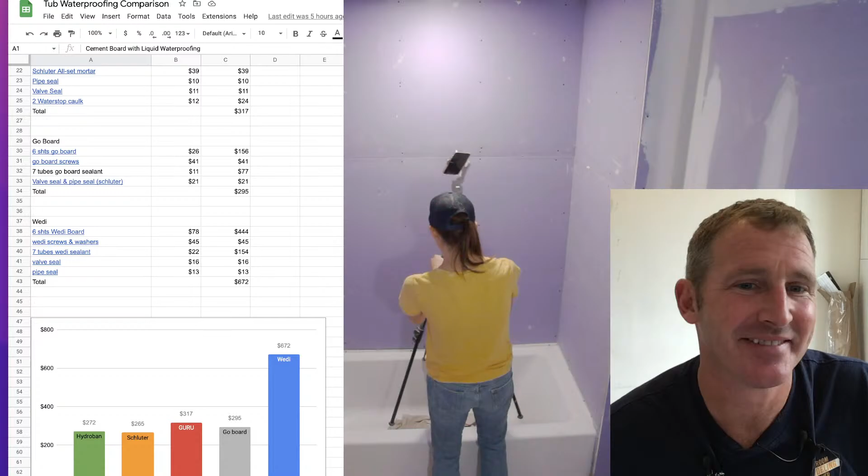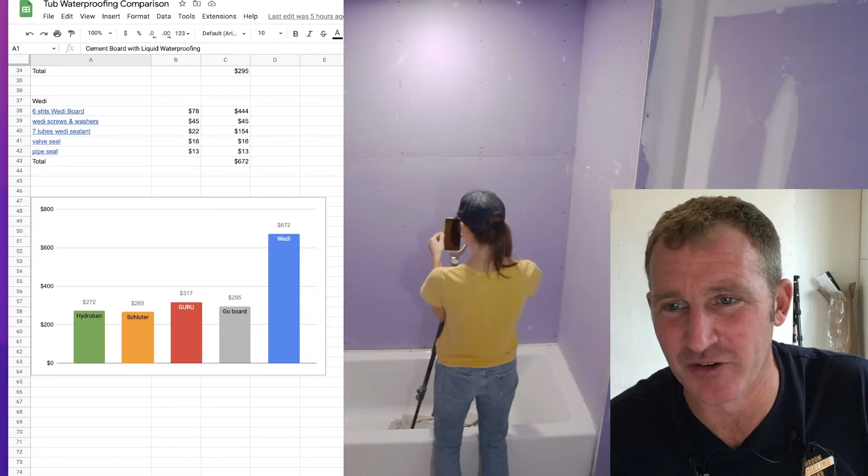I have a really good live stream here today. We're going to go over installing a tub surround, or waterproofing a tub surround. So as you can see in the background here, we installed the tub. I put drywall up. I know that seems crazy to a lot of people, putting drywall up around a tub surround.

But we're going to get into waterproofing this and why I used drywall. But first, before I get started, I wanted to talk about the different systems that are out there, because I often get questions about what's the best system, what system do you recommend, what would you use? I use all types of different systems.

They all have their applications where it's helpful. A lot of it really does just come down to availability though, and the timing of when I'm going to purchase this stuff. Sometimes these foam boards and different things get out of stock and it takes time to get them in. Sometimes it's just budget related and I don't have the expense to get the better systems that I like.

So let me go through. I've created a little comparison sheet here that I put up this morning. This is with 2022 pricing, whatever day it is today, September 13th. So take this with a grain of salt if you're watching this later on, because prices can change on a lot of things.

But I created a spreadsheet on what it would cost to do a standard tub surround. The one thing about the waterproofing system is that's all we're trying to do - get the shower waterproof behind the tile so the tub surround can last a very long time. That's really the main goal of doing any of that.

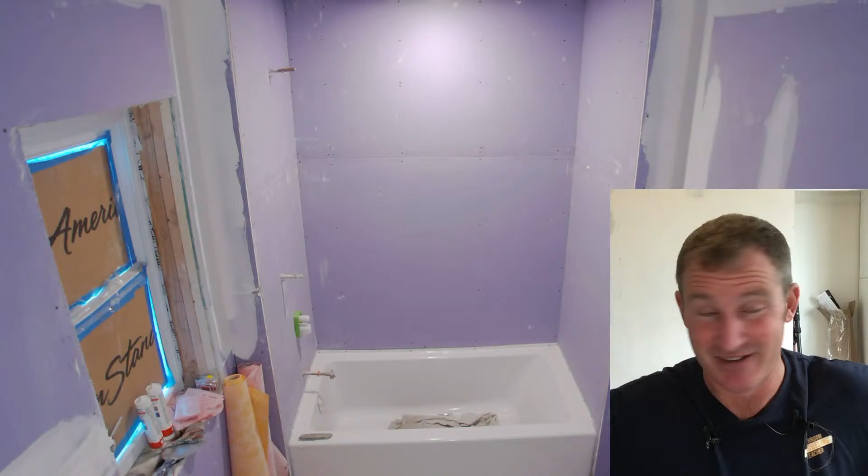That's not to say that when I first started out, I used HardieBacker and cement board and went directly over it, and it seems a lot of those tile jobs are still lasting today. But if you do the waterproofing, you'll ensure things last a really long time and you won't have mold issues later on.

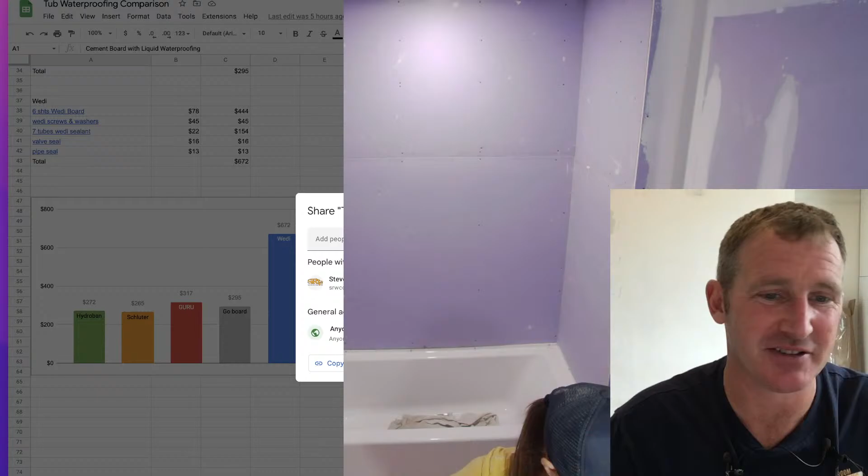This is basically just a highlight of what it would cost to do cement board with a liquid waterproofing. That seems to be a lot of people's go-to - they want to do cement board, maybe do a RedGard. If I were to give you a recommendation, I'd go with something like Hydroban if you're going to do a liquid membrane. Cement board obviously is just available everywhere.

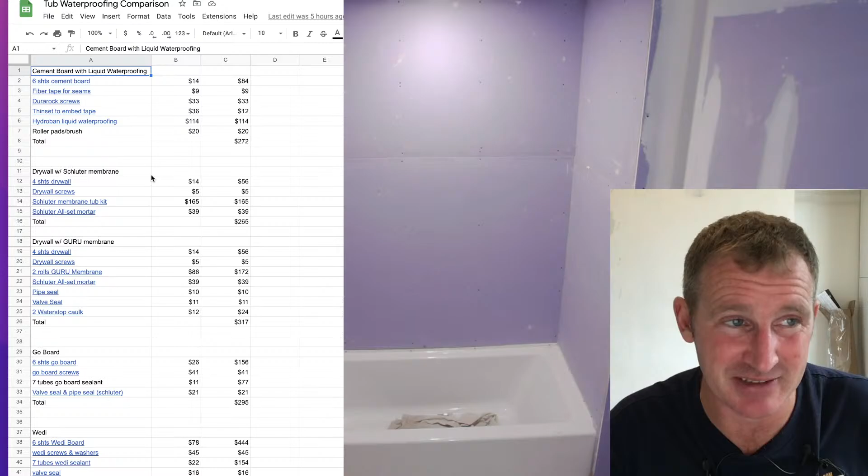You can almost always get it. You might just go to the home store and that's where you want to buy everything, so you're definitely going to be able to purchase this at any home store. Looking at this, you can click on these links, by the way, and it'll bring you wherever I have the links to. So Home Depot - cement board's what, $14 a sheet? Not too bad. You need about 6 sheets to do a standard tub surround.

So you're only talking about $84 for cement board. That's very appealing to a lot of people, makes a lot of sense. But it takes a little bit more time to install, it's a little bit difficult to install, it's dusty, especially if you're using something like HardieBacker - cutting it is a nightmare.

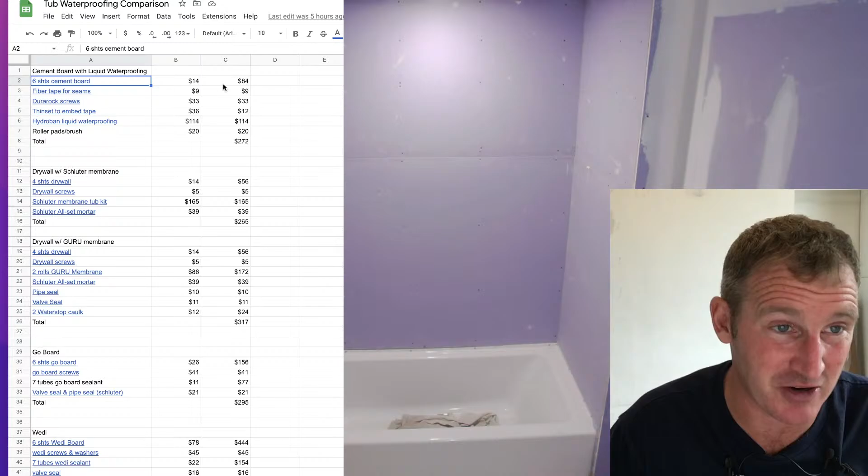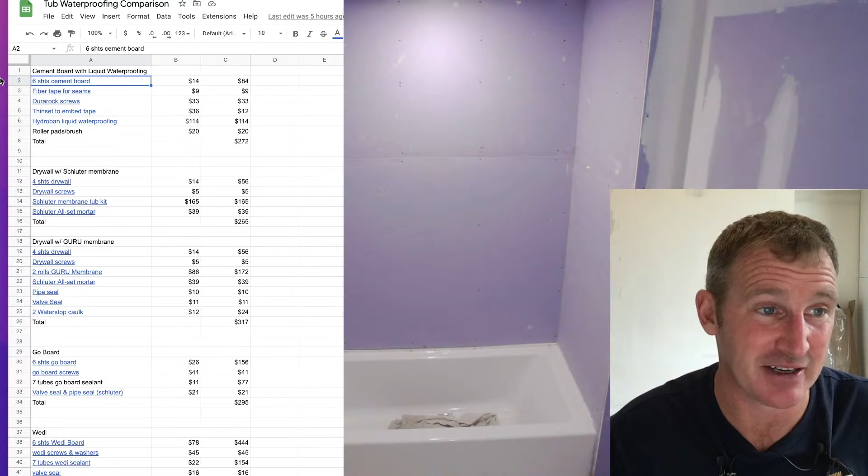Overall, it's just a little bit more cumbersome to actually install the actual product. Plus, you have to address all the seams. So you're going to have to do some kind of fiber cement board, or a fiber tape, that you're going to have to embed with thinset on all the seams. So that takes a little bit more time.

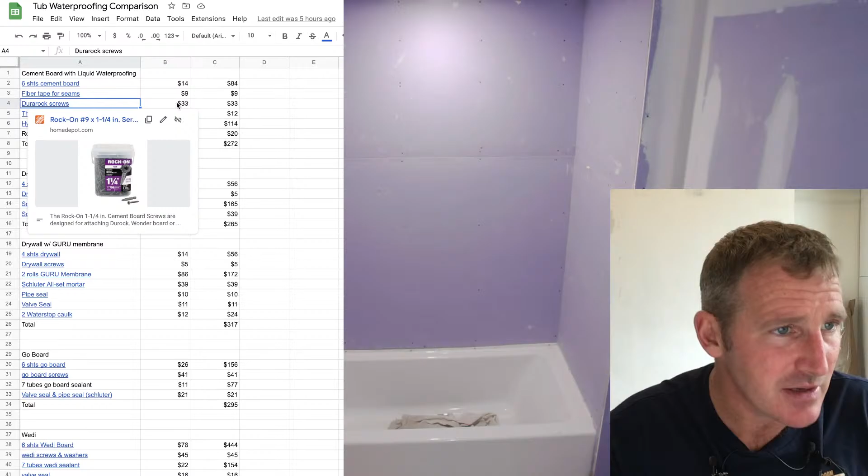You got to let that dry before you go moving on to the liquid waterproofing. So here's a recommendation I have: I would definitely recommend using Hydroban if you're going to go with the liquid waterproofing concept, because it dries really quickly. You can get 2 coats on immediately.

A lot of people like going to the home stores and just buying the RedGard that is sitting there. That stuff definitely takes a long time to dry, and really to get it to the mil thickness that custom wants you to be at, it might actually take you 3 coats to get there.

So if I were to do cement board and seam the tapes with the fiber cement and then liquid waterproofing, I'm definitely not going to get onto the tiling until the better part of the following day. You pretty much have to put a day into putting the cement board up and putting the fiber on, and then the next day doing the liquid waterproofing. So if you're in a crunch, you're kind of drawing out the project because of the time period for everything to dry and get ready.

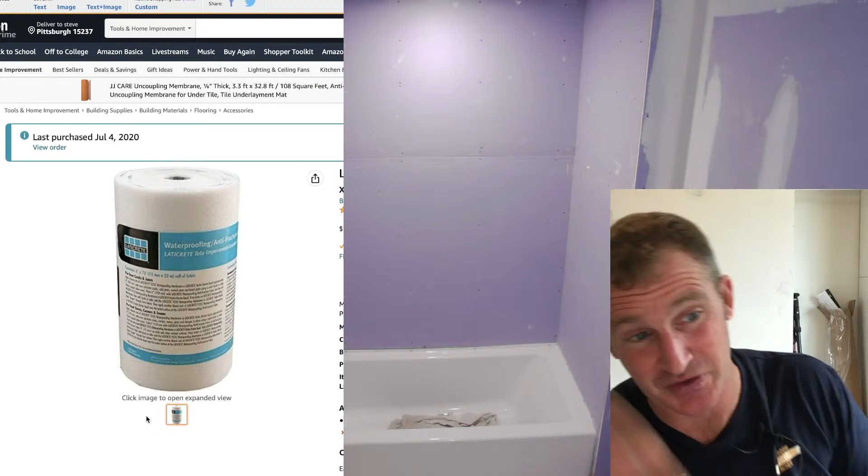Now you could use a rapid setting thinset, and that would address those seams. And Hydroban, you could technically just use their mesh, and use that as the fiber mesh aspect to it. So that might actually be a really great option for you, because you could get that all waterproofed and put in on a day. It's really hard to argue the cement board aspect with liquid waterproofing.

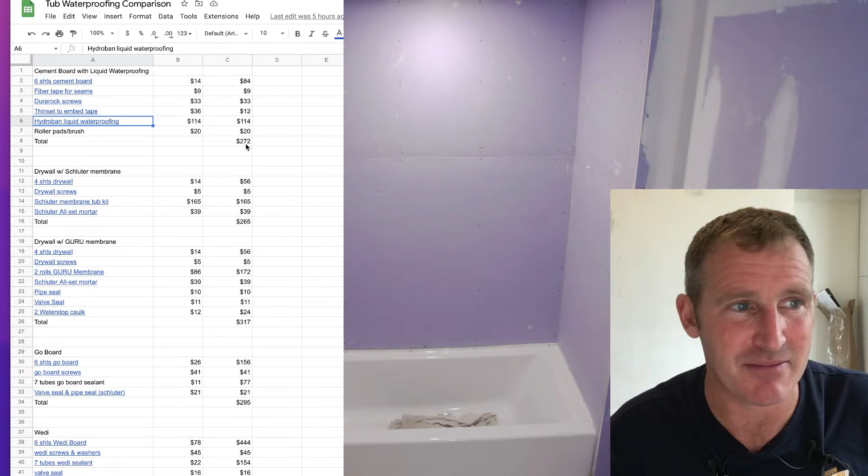It just takes a little bit more labor to install, but you can see here that my price of $272, you can get your tub surround with the backer board and liquid waterproofed. That's a pretty phenomenal price. Anything under 300 bucks is usually pretty dang good for doing a tub surround. So it's definitely a grade A way to go. Again, it's just a time consuming thing. It's going to take you most of the day probably to get this accomplished and be ready for tile.

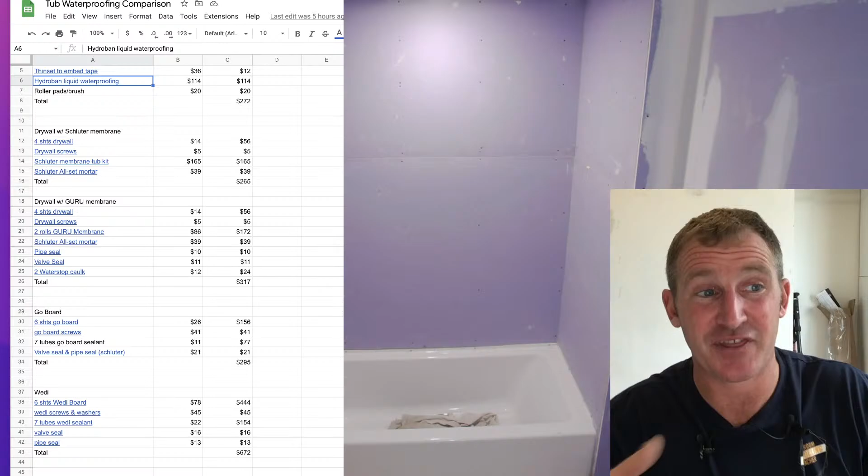So the second one and the third one are basically the same: it's a membrane over drywall, and that's essentially what I'm going to be doing on this shower, because you can see I already have the drywall up, and I'm going to be putting a membrane over it. This is very appealing because drywall is available everywhere, really easy to install, and it only took like 4 sheets to do the entire tub surround, and then I'll be thin setting a membrane over top of it.

A lot of times Schluter is probably the most popular type out there, and you can get it in a tub kit, which is actually a really reasonable price, I think, for the most part. This one, you get the membrane, you get the Kerdi-Fix that you would need to put around the perimeter at the tub flange, and then you get the pipe seal and the valve seal, and then some Kerdi-Band as well, all for $165. So that's really not too bad, everything considered of what you get in there.

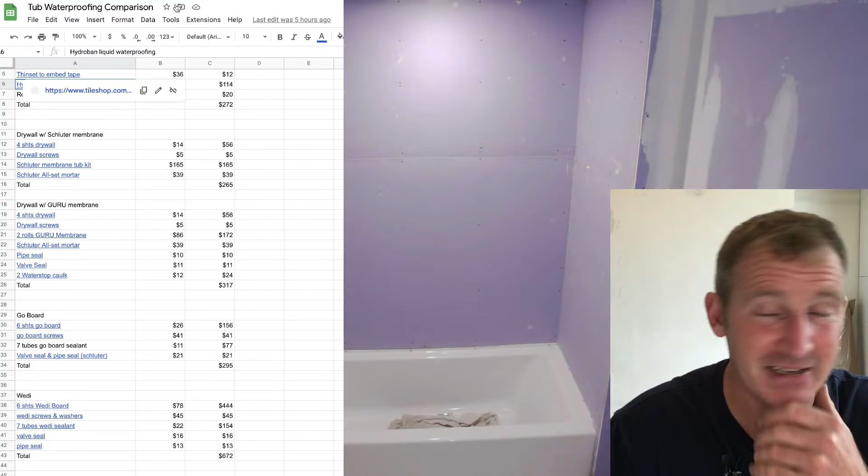And that's probably the most available. You can go to Home Depot, be able to pick up Schluter, and any tile distributor is going to have it as well. So it's very appealing to use that. You're going to need thinset to adhere all of this, and I would say that's probably the biggest thing that is kind of problematic with doing the membranes. It's just kind of messy. You're really troweling it all on and installing it.

But the great thing is with the Schluter membrane, or the next one, which is the one I'm actually going to be installing, the GURU membrane, is that you can just move right on to the tiling process directly right after you're done setting it.

So that has a lot of appeal. Not that most of you are probably going to be tiling the same day—you're probably going to just do the waterproofing and get started the following day. But as a contractor, it's nice to be able to immediately start tiling if I wanted to, because it doesn't take a whole lot of time to actually set the membrane. You'll see in the live demonstration, probably about 45 minutes at most. I want to share tips and tricks on how to do that.

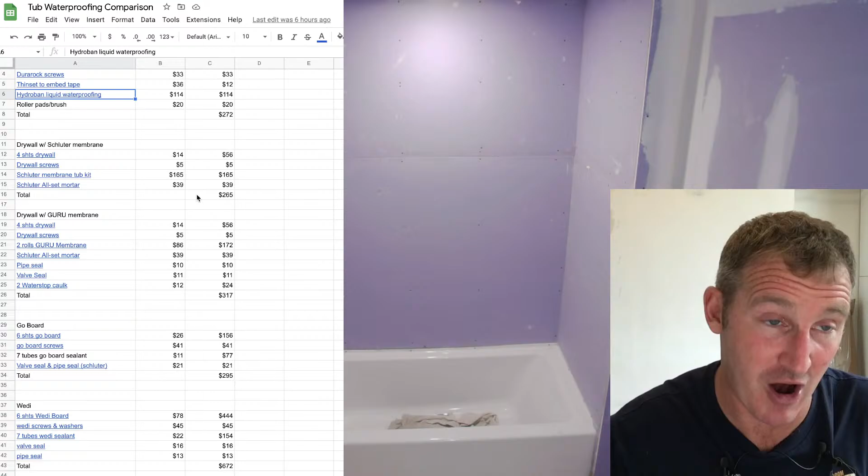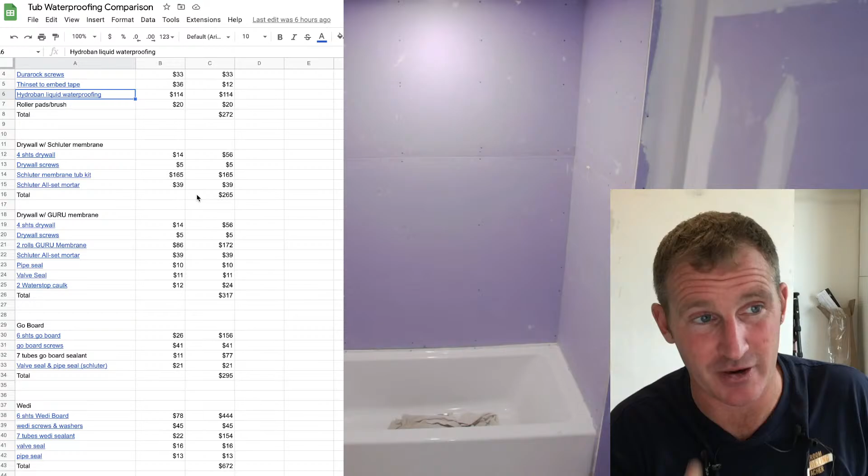But Schluter is really hard to beat, really great, $265. So you're actually a little less money than doing cement board with liquid waterproofing. That's the only reason you could get a little cheaper with a liquid membrane. You could go with RedGard and lower that expense, because $114 for Hydroban increases the cost. You could get RedGard for 50 bucks. But RedGard takes a while to dry, and you need multiple coats to do it properly—one coat isn't enough. That's a problem. They do have a rapid-setting version from Custom for RedGard, but you're probably at the same price as the Hydroban. So really, Schluter is pretty much the winner—it's the cheapest of all the systems to do.

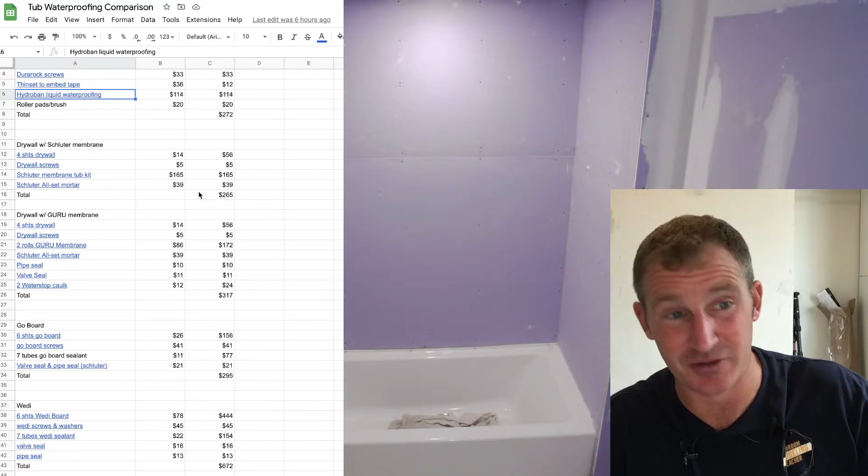So that definitely has a lot of appeal, and also being able to get it at your home stores.

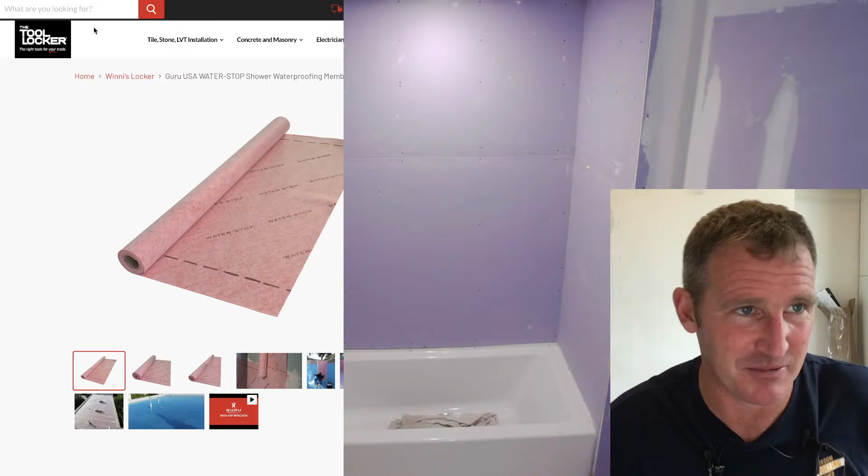So the system I'm actually installing today is the Guru system. It's pretty much exactly like Schluter, except it's red. One thing that appeals to me—I have to give a shout out to Misha from Winni Designs. He's the one who brought this to my attention, and I've seen him install it many times. If you go onto his YouTube channel, you see he's the guru of Guru and installs a lot of it. What I've noticed is when he pulls back the membrane, he gets great coverage, better than what you can probably get on Schluter. This will be my first time installing it, but it's the same method as Schluter—I think the membrane has a better fleece, and it'll be easier to get that coverage on the back.

I'm really excited to start using this system, because I think if you've ever had issues with Schluter before, most of those issues—we'll get into where they come from later—usually come from the thin-set application. Whether you leave the thin-set on the wall too long so it doesn't adhere properly, or you just don't get enough coverage on the back of the membrane, I think that's where the Guru membrane will make a big difference, because I can already tell the fleece has a better grip on the back. I'm excited to show you this.

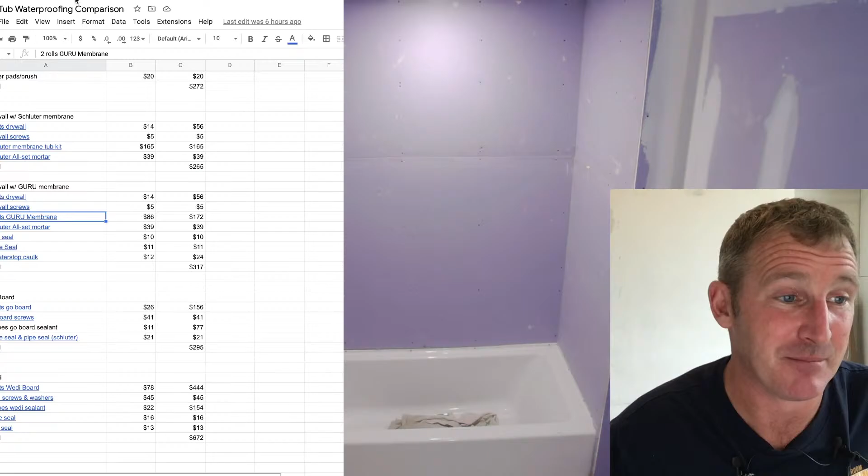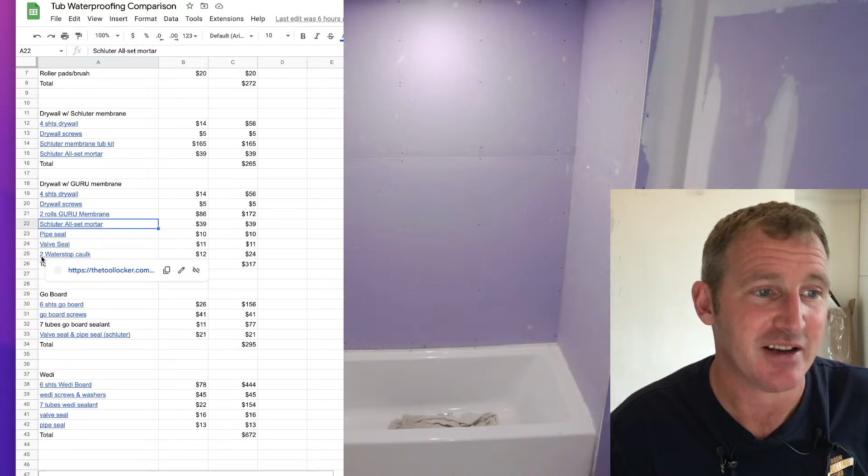But these don't come in a kit—you have to buy it in separate rolls. So I got 2 rolls of Guru, and I had to get the pipe seal separately, plus the caulking that goes along with it. So the Guru system was about $50 more—we're looking at about $317 for the Guru system. Again, the benefit is that I can pretty much tile on it immediately after I'm done. Overall it's a fairly easy system, kind of foolproof in a lot of ways, because whatever you're doing with the drywall, you can always patch or fix things with the membrane. It's a lot easier than any of the foam boards as far as patching, since you have excess membrane to cover things. That's what we're going to do in this video.

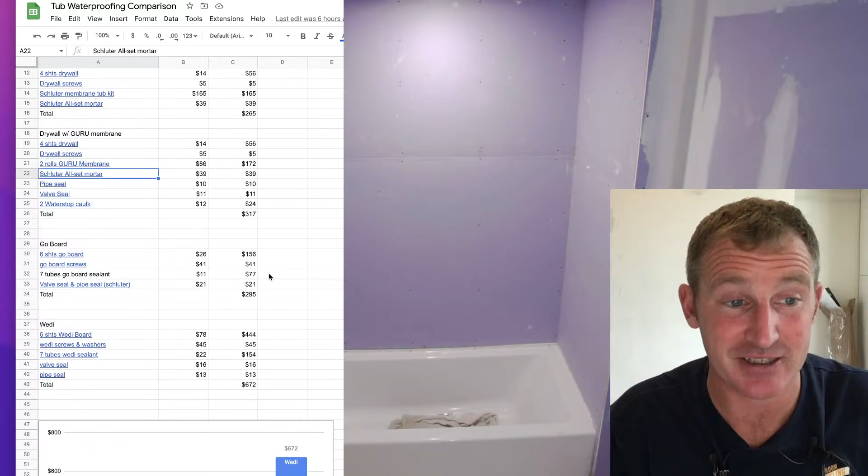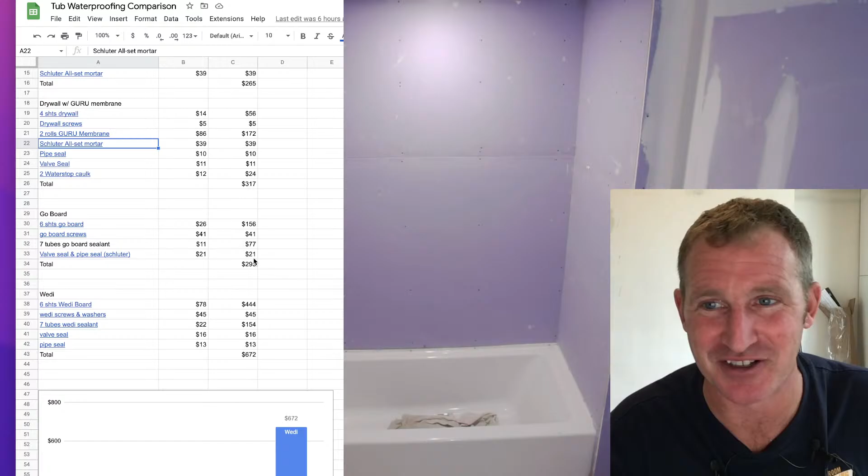But I wanted to go through the other two options that I think are really great for waterproofing a tub surround. Probably my favorite, honestly. If I just did it on every single surround, my channel would be pretty uninteresting, but I'd go with this every time if I had the choice and it was available. That's using Go Board. You've probably already seen it on my channel a bunch of times.

But I think this stuff is phenomenal. It's a foam backer board, it's a sealant application, comes in a 3x5 sheet. Really lightweight, easy to cut, no dust. You do the sealant application, wait about an hour, and then you can start tiling. So between the membrane aspect and this, you're talking about an extra hour before I can tile, which probably isn't going to make a difference to anybody for the most part.

It has a great price, about 26 bucks a sheet, though it depends on where you're at. Right now that's roughly what I've been paying, about 25 bucks a sheet. You only need 6 sheets. You're going to need the Go Board screws, which are a little expensive, a bunch of sealant, and the pipe seals. The pipe seals they don't actually make, so I usually just order them from Amazon, my home store, or my local tile distributor, and get the Schluter pipe seals for it. That's not part of their system, but I think it's important to go around your pipe seals. So about $295 for the foam board.

It's arguably going to be faster and easier than doing the membrane I'm about to show you. And anybody who's ever taken my recommendation to use Go Board has always said thank you, that was really awesome, that really sped up the time and made it a lot easier.

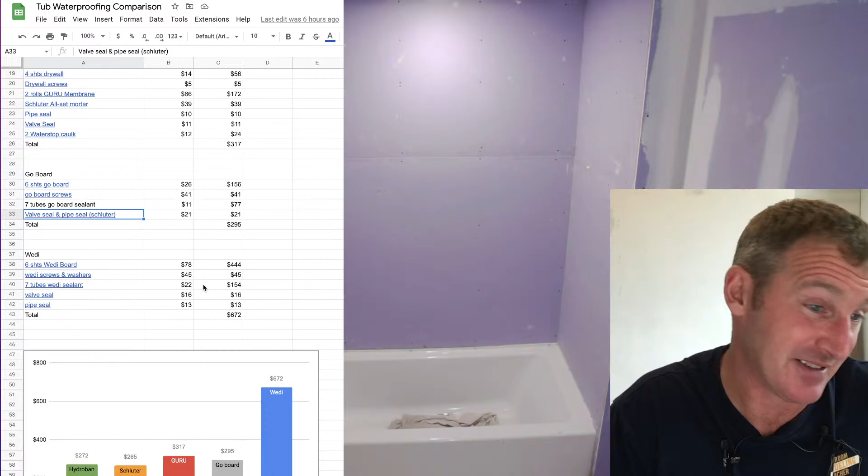So in the same vein, if money wasn't an object and it didn't matter what it cost to get something waterproof, I'd probably go with Wedi. Wedi was the original board that came out, I don't even know how many years ago, 17 years ago or something like that. I used this exclusively for probably 30 to 40 bathrooms, if not more, and it was really my favorite go-to for many, many reasons.

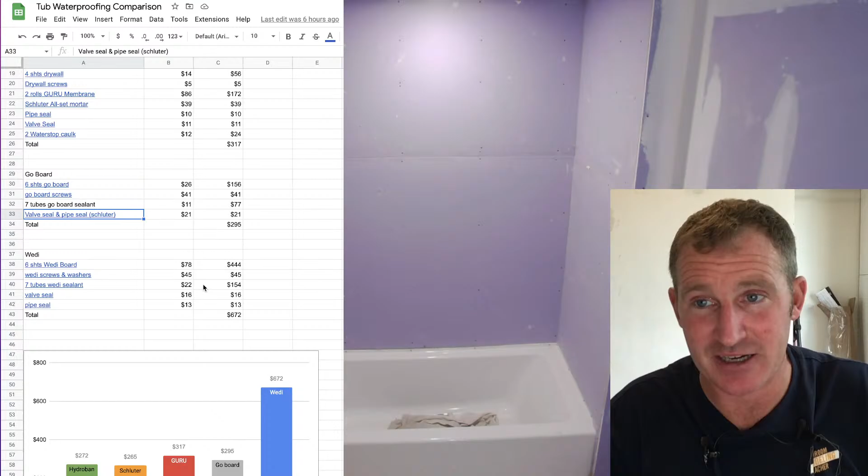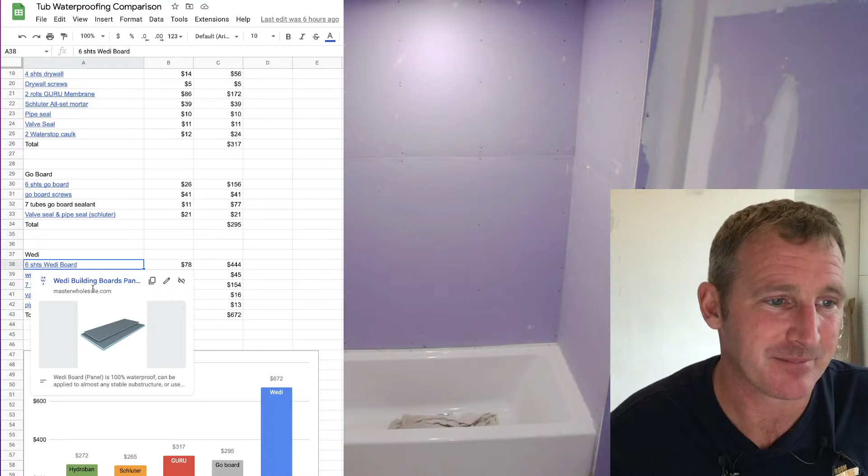We'll get into more of that later when I'm actually demonstrating the install, because I have a couple of samples to show you. But the big thing is that it's waterproof all the way through the board, and that's a big feature. It's very durable, has a really stiff cementitious outer cover. It's a sealant application, so really simple. Once you put this all together, same as Go Board, an hour later you can pretty much start tiling.

The other nice feature, I love this for showers. If you're doing a regular walk-in shower and you have other contractors working in the area, you drop a tool on the Wedi, it's not a big deal, because as long as the tool doesn't go all the way through the pan, you're in good shape, since it's waterproof all the way through that surface. So there's a lot of great things.

One of the nice features, what would I use Wedi for right now? If I was doing a pretty intricate tile job, say a herringbone tile pattern on all sides of the wall, I'd probably go with Wedi, because herringbone can be difficult to make some of those angles exactly the same width coming up to a bullnose edge.

It'd be nice to be able to take your grinder and just scribe cut the tile after it's set to make a nice straight line. I could do that with Wedi because I don't even have to worry about it penetrating the surface of the board, since it's waterproof all the way through. So there are things that make it nice, so when you're installing tile and want to touch something up, you can do that without worrying about compromising the waterproofing.

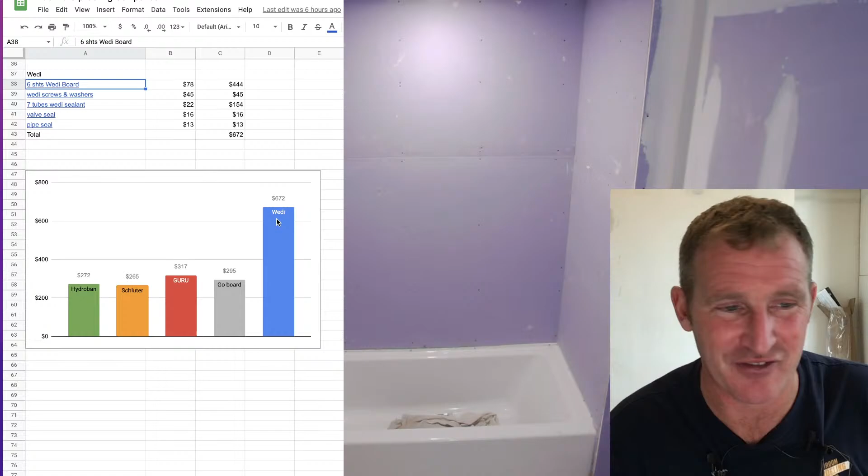And then the sealant is like double what all the other sealants are out there. So we're looking at a grand total of $672 for the Wedi system. That's absolutely ridiculous. I would hope that if you're a contractor, you can go to your tile distributor and lower that, but I guarantee it's still going to be over $500. It's totally ridiculous, almost double what everything else is. Looking at this, they're all pretty much the same except for the Wedi.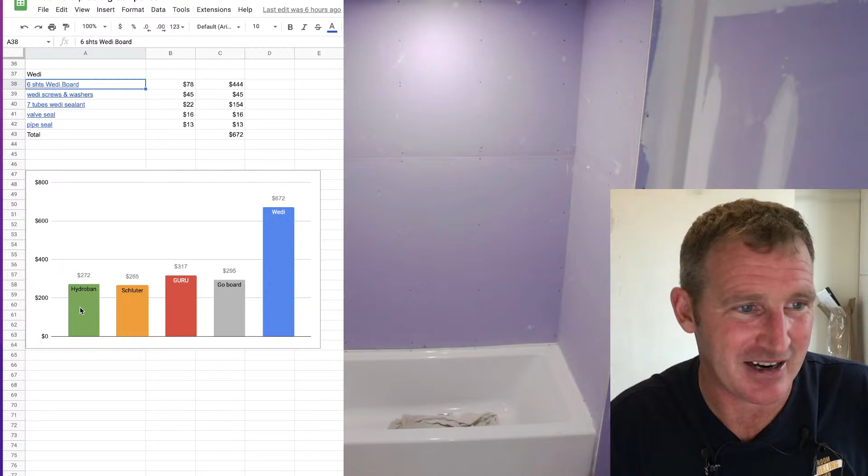Hydroban with the cement board, $272. Schluter, $265. Guru was $317. To be fair, with the Guru I'm actually getting more membrane than what the Schluter kit sells. I'm getting a little bit more waterproofing out of Guru because I got 2 rolls that I'm going to be basically running all up the ceiling. So to be fair, it's pretty comparable. Guru is just a little bit higher price overall, but it looks a little more drastic than it really is, because I'm actually getting more waterproofing the way I did it.

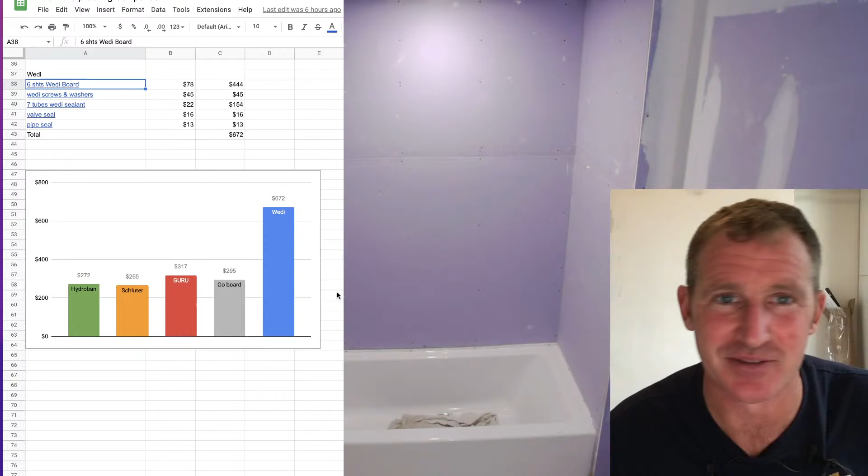Schluter has a nice kit you can just buy, ready for the tub surround. Go board is $295 — if you know, I'd probably just go with that all day long, because that's one of the easiest systems to install. And then Wedi, $672. So there you have it, that's the price breakdown.

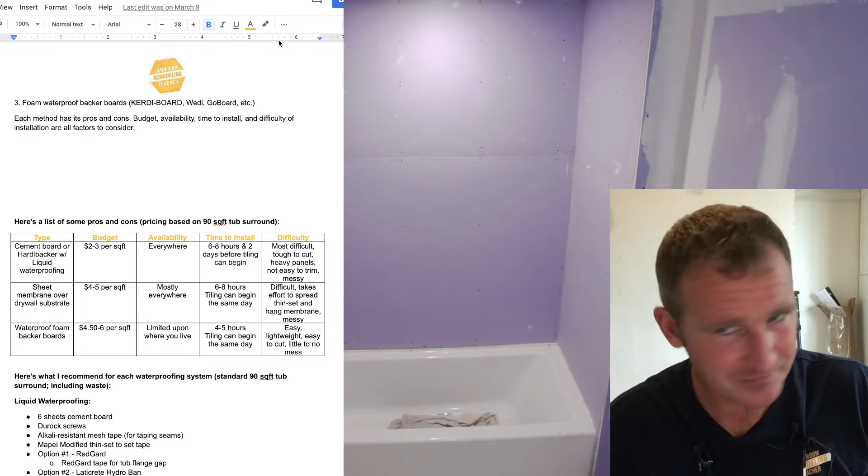I don't know why it doesn't show me with live on here on the desktop. Is it working on yours though? Yeah, it's working on my phone. Did you type in your name? I'm already on it.

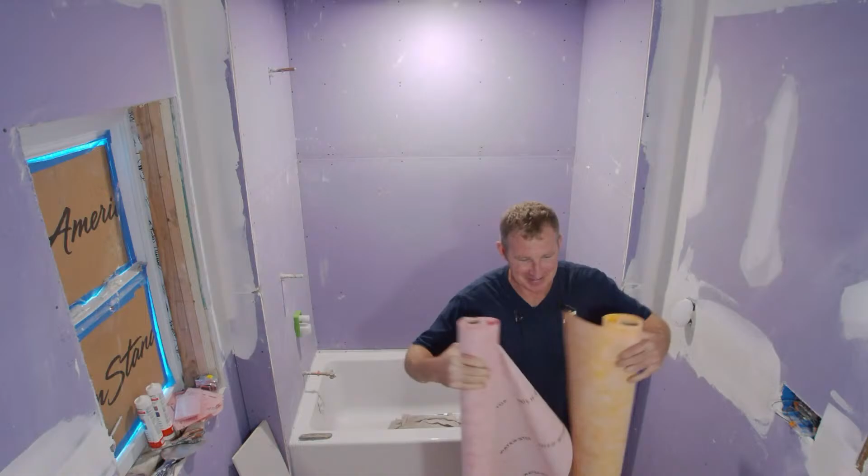I always get questions on why, what system do you use to waterproof your shower? What's the best way to go? And what do you recommend? Well, that's a tough question to answer, mainly because there are so many different methods you can use. And these days there's a lot of problems with availability. So really availability seems to be the biggest thing - getting the stuff where you can get it, where you shop, and trying to get that ahead of time. But what I'm actually going to be installing today is the Guru system.

So I have to give a shout out to Misha from Winnie Designs. If you follow him, you know he's the guru of Guru, and you've obviously seen a lot of his membranes. I wanted to try this out, not just because Misha highlighted and showed such great videos on it, but I noticed when he was checking his coverage - this is going to be my first time installing it - he sent me something a couple of months ago. What I was impressed with so far, and we'll get into this, is the membrane - the back of the membrane, the fleece, is really much more fleecy than the Schluter membrane. So I see a lot of issues with Schluter, people commenting that they have issues getting a good bond to this. And I'm going to highlight, even with installing this, how to avoid having any of those issues.

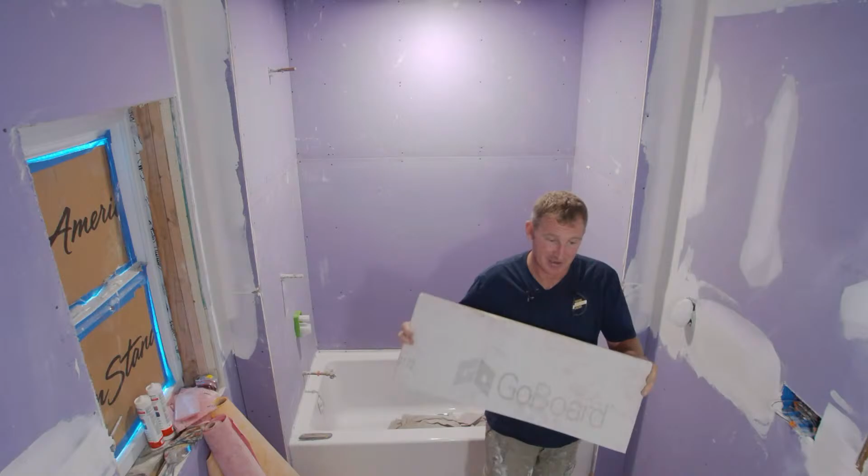But Go board would probably be my go-to. I would recommend that for any beginner, so much easier. But as far as the membranes go, this is just a good availability aspect, and I could pretty much tile immediately after I'm done. So those are kind of my reasons for it.

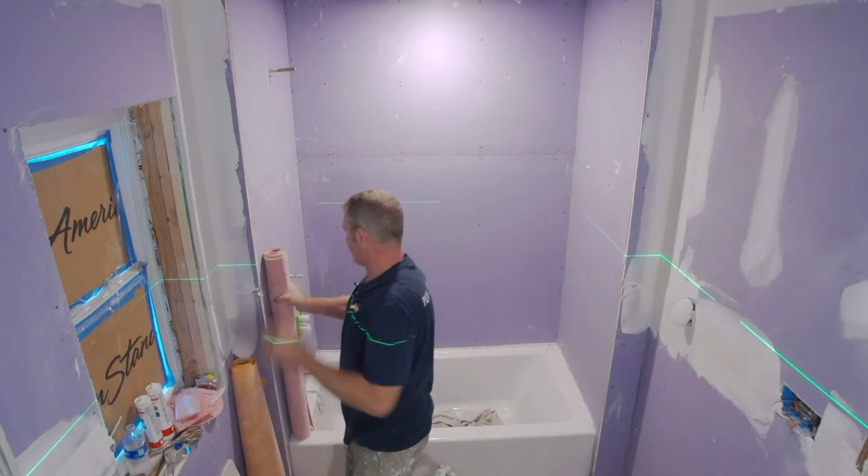It'll make it easier for me to spread the thinset, because one thing about spreading all of this thinset is you don't want it sitting there for a very long time, or you're going to have a bonding issue to the actual fleece. So it's really important to basically just cover what you're going to install. If you're really slow at troweling and haven't done a lot of this, I would recommend separating the walls. But I'm going to actually run this all the way around, so I have a continuous joint in the corner. To me, the less overlap or lappage of it, the less I have to overcome when I'm actually installing tile.

I've already checked to make sure that everything is nice and flat on my walls. Now, some of you are going to be asking, I see a lot of people finishing the drywall. I don't really find that to be necessary, and honestly I prefer my thinset to actually bond to the drywall and not to drywall mud. So you don't have to tape your corners.

You don't have to tape this if you don't want to, and I prefer not to, because I think having the thinset actually bond to the drywall is better than the drywall mud. Just try to be as tight as you can.

Now I am going to be putting a couple recessed niches in here. I had my 2x6s framed out, and I'm going to cut that later because I haven't got the tile yet, and I'm not 100% sure of the height and how it's going to work with my tile design. So that'll be for a future video, but I'm just running the membrane, and I'll be cutting that out later. In a lot of ways it makes it better and easier, because then you get a real reference of where your tile layer is going to be at, and that niche can look perfect.

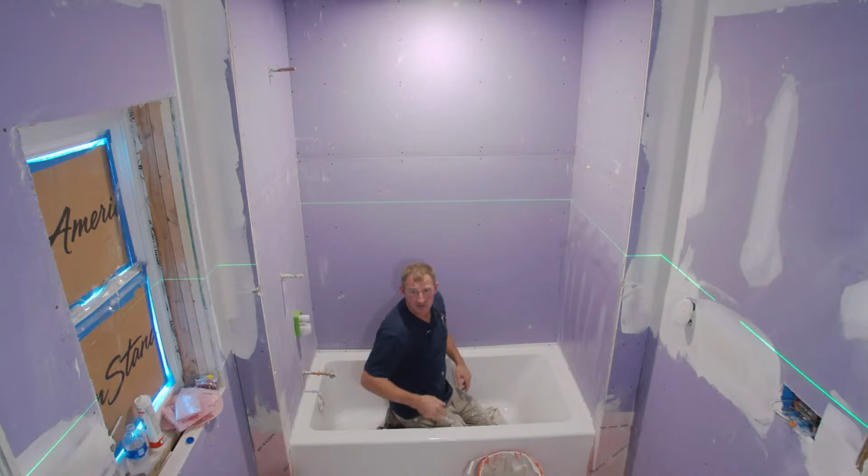You alright? Do you want this stand? Okay, yeah, when you move that around, it's hard for me to speak through stuff. All right, let me try that over again.

All right, so first step is to wet down the drywall, and this is basically to keep that thinset from zapping the moisture out of it. So what I'm using is an 1/8 by 1/8 inch square notch trowel, and the biggest thing is making sure it has a loose consistency. This is usually where all the problems happen with membrane installation, is it not bonding well to the actual membrane. So just take the flat side of your trowel and bed the thinset into the substrate.

So everywhere that I'm going to be troweling, I'm just working the thinset into the substrate, and then I'm going to do directional troweling.

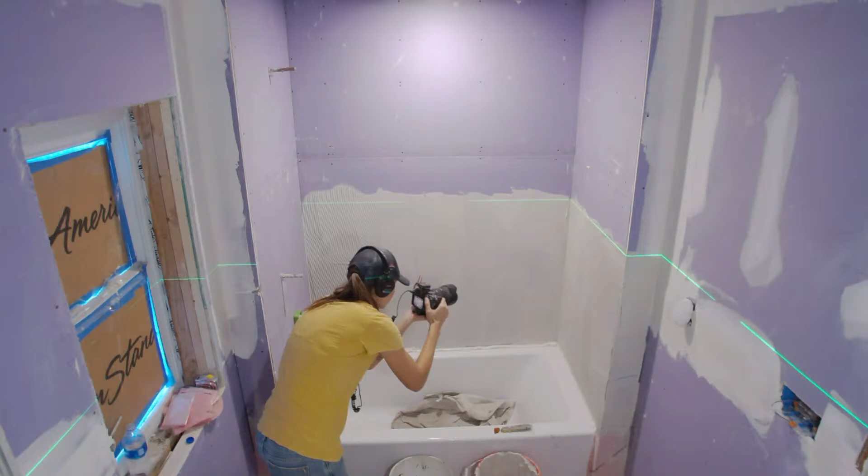Okay, so bonding of the fleece. We're going to wrap this around that corner, and we're just going to try to maintain visual of our laser here. It'll help kind of guide us.

Okay, so biggest thing here is trying to get this in this corner as tight as possible. All right, so we're going to get this nice and tight with our bottom here, try to eliminate any of the air bubbles. So before I start moving along here, I want to just tuck this into this corner with my knife.

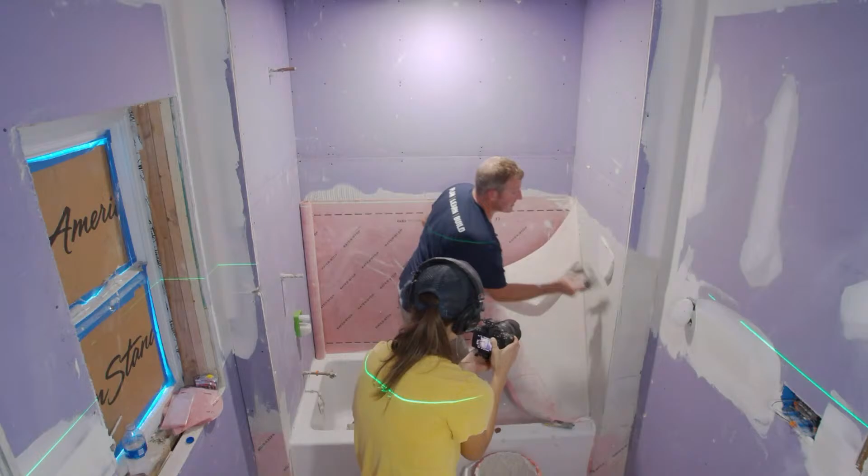So I want to get more thinset on this area. And again, it's not going to hurt to pull this stuff off of here. So there, that's good coverage there. It really is primarily right in this area for some reason, so maybe it's skinned over a little bit. Doesn't really matter, but it's not going to hurt to pull this off.

Chase those air bubbles out of here. I think I needed the corner better too, but we'll check this again real quick.

Yeah, much, much better, that's what you want to see. Now, again, I do have this corner, and I had a feeling that was going to be a problem right here. So we'll get more thinset all the way along this corner, and then we'll get more on this outside flange. I try to make the drywall as square as possible so that I can eliminate an issue there. But the most critical part is just double checking it, that's for sure, because you can't really do it later.

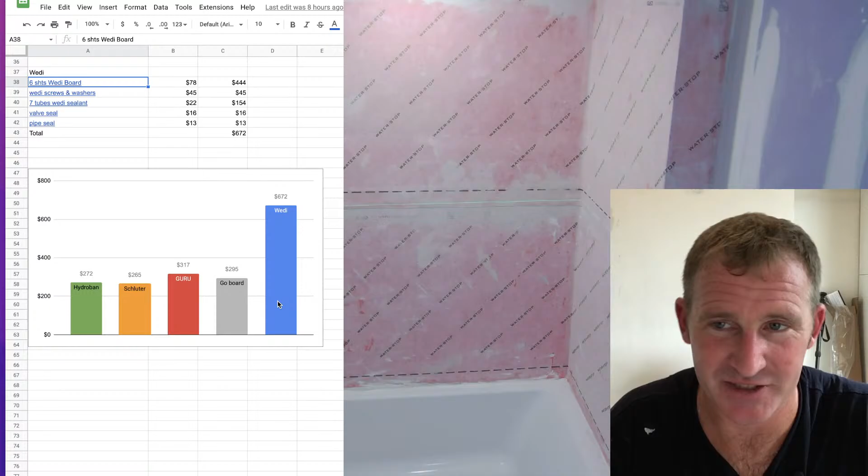But if I had the choice, I would definitely go with Go Board all day long, just because of the speed of it, I would have already been done with that project. And in wedi, go back to the beginning of the video to see my comments on that. But wedi, I feel, is the best backer board, but it's just unrealistically expensive for most people. So, that's where I'm at with that.